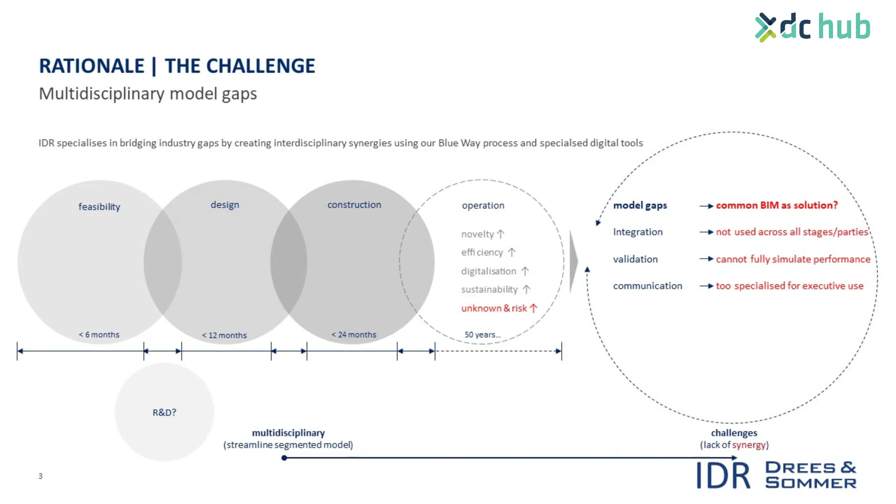To start with, not everybody uses BIM. Certainly not during every stage, and certainly not at every level within any discipline or organization. The second thing is that from a validation standpoint, BIM does not really have the tools to simulate everything. Like, for example, energy performance. Most BIM tools don't do that, or structural calculations, or financial modeling. Most BIM tools do not do that. And I've heard a lot of claims suggesting the opposite.

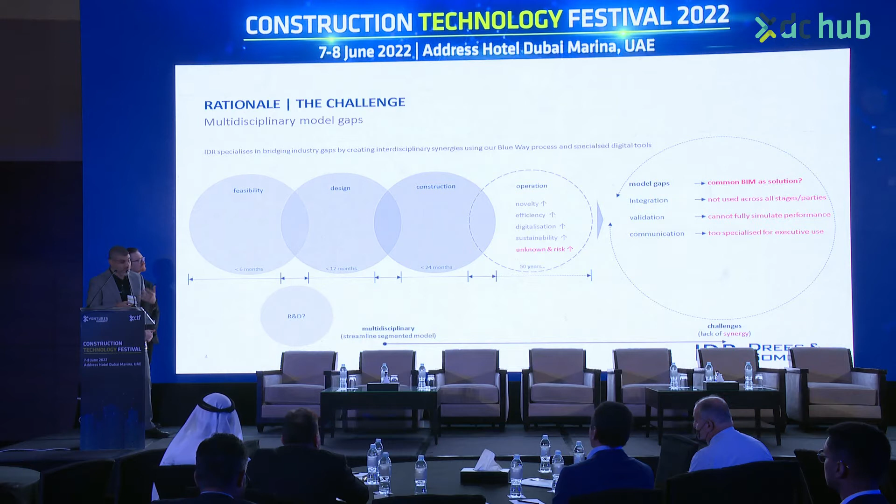From a communication standpoint, because not everybody uses BIM, not everybody is aware of the day-to-day activities and the updates and so on. So there are many challenges and gaps that BIM brings along. So one of the things that we wanted to do from a strategic standpoint is to adapt the multidisciplinary model into something which is more dynamic and interdisciplinary, where we would have a core team that is specialized in whole life cycle design, constructability, operability, and research and development, especially when you have innovative projects.

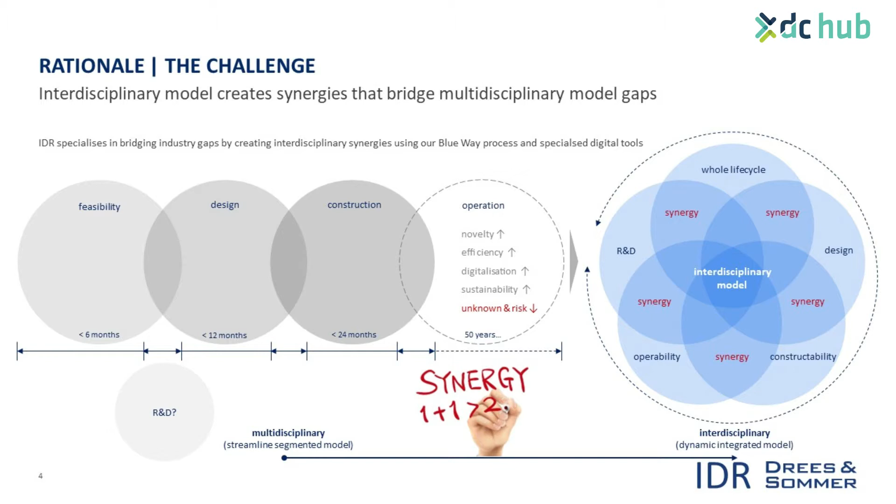When we have innovative projects that require new solutions, new designs, we almost never see a stage called R&D in building construction projects. So if we have this core team that starts with us the feasibility study, and then we maintain that core team throughout design, construction, and operation, at least you know that the criteria is being maintained and things are not lost or miscommunicated.

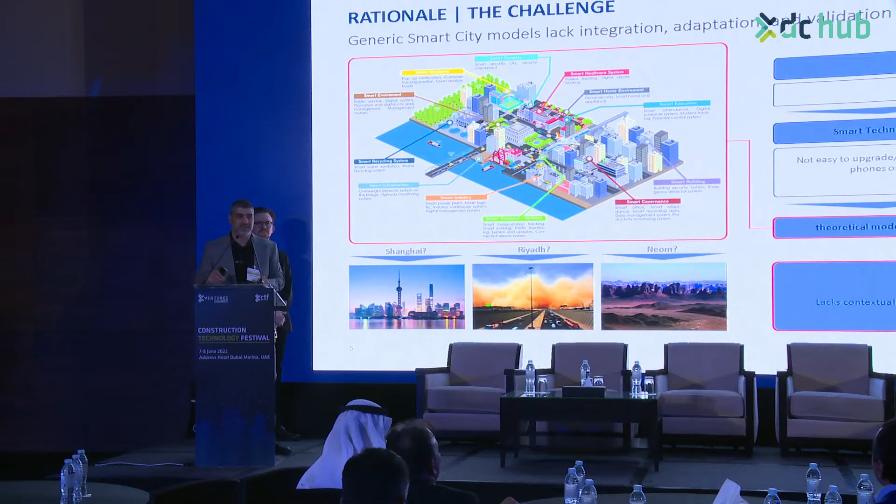Now, we are especially experiencing these problems and challenges when we receive, for example, RFPs to do smart, innovative developments, even more so cities. As you all know, this is still pretty much a theoretical idea. There are a few smart buildings here and there. There are a few small smart developments here and there. But an actual full-fledged smart city is really still theoretical for the most part.

If you go into Google and type smart city, you're going to get a lot of these similar diagrams. They look fantastic from a graphical standpoint. However, when you try to adapt them to actual scenarios, say in Riyadh, how many of these smart city theories have taken into account sandstorms? Or if you want to apply them in a place like Neom, which is very remote and has no infrastructure. So you start seeing a lot of struggles, if not failures, when you try to adapt them, because for the most part we're using new and old assumptions and theories.

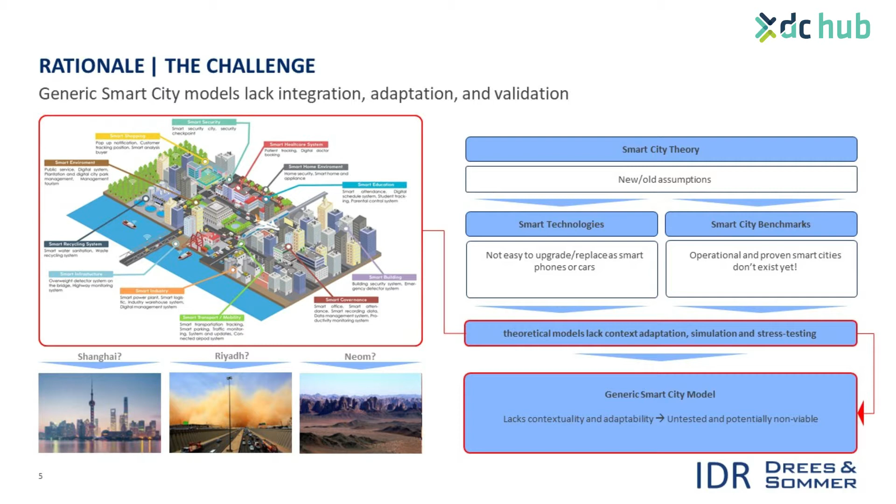Also, many of the technologies are borrowed from other industries, so they were not really made for the building industry per se. And therefore, we create these generic smart city models which lack contextuality and adaptability, and for the most part are untested and potentially non-viable. Another big challenge is that when you bring all of these consultants on board to help you create these models, they speak different languages, they produce their information in different formats, and they use different logics.

So to have a party, be it a person or a group, being able to read all of this information and create the bigger picture in their mind, we call it creating the mental model, right? It's a very, very difficult task indeed.

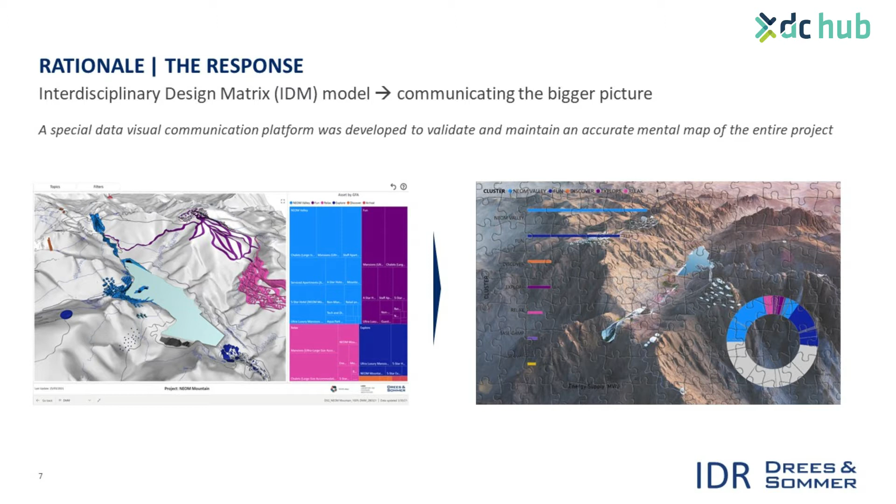So one of the things that we thought we could do is maybe create a tool that can help us, at least from a high-level executive standpoint, to capture the essence of what all disciplines are producing, right? And integrate them together so that we can get a clearer picture. As I said, this is especially targeted for executives because people who are involved on a day-to-day basis have a better understanding of the project.

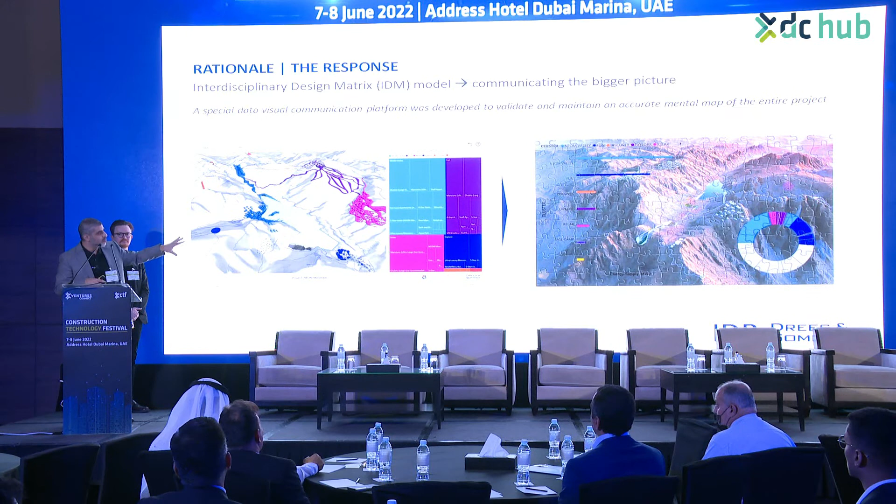Executives, however, need an executive summary, right, which you cannot provide in BIM, you cannot provide in digital twins, and so on. This is basically what we're aiming for. And my colleague here, Dr. Greig Paterson, is going to present a case study to demonstrate how we tried to do that.

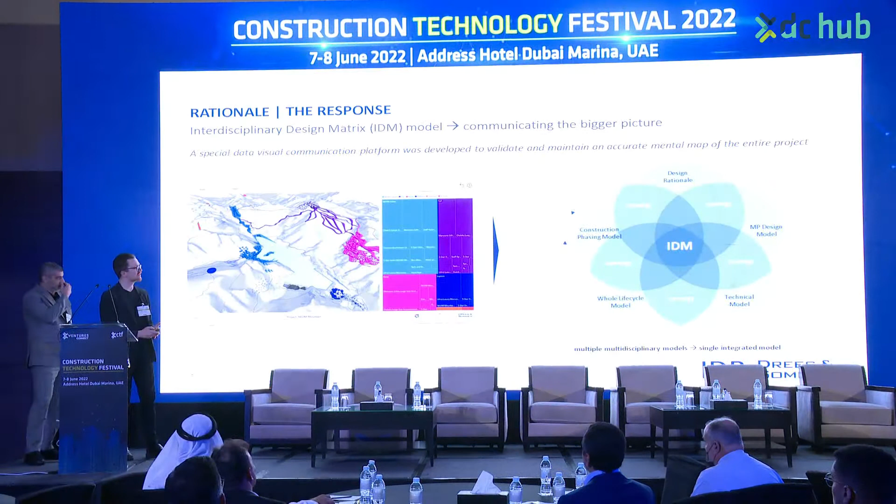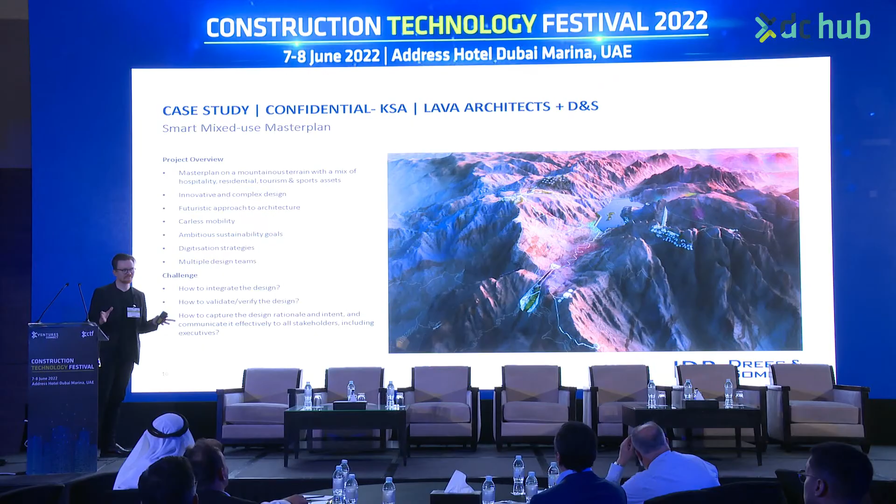Yeah, so as Majid mentioned, the best way to demonstrate this is just to walk you through a very quick case study. So this project is somewhat confidential. I'm sure many people in the room recognize it. It's in Saudi Arabia. It's in a very challenging mountainous region.

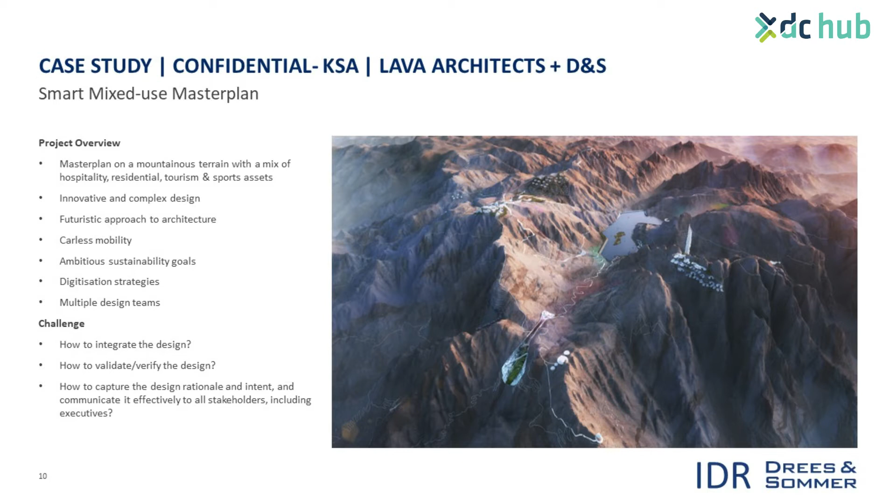The strategies within the project are also very ambitious: very futuristic architecture, carless mobility, digitization strategies, very stringent sustainability goals, and all of this mixed with a very large design team working on different parts of the design. So our challenge was, A, how do we integrate all of this together, and then B, how do we communicate this to key stakeholders, particularly at the board level, who are not necessarily engineers and designers.

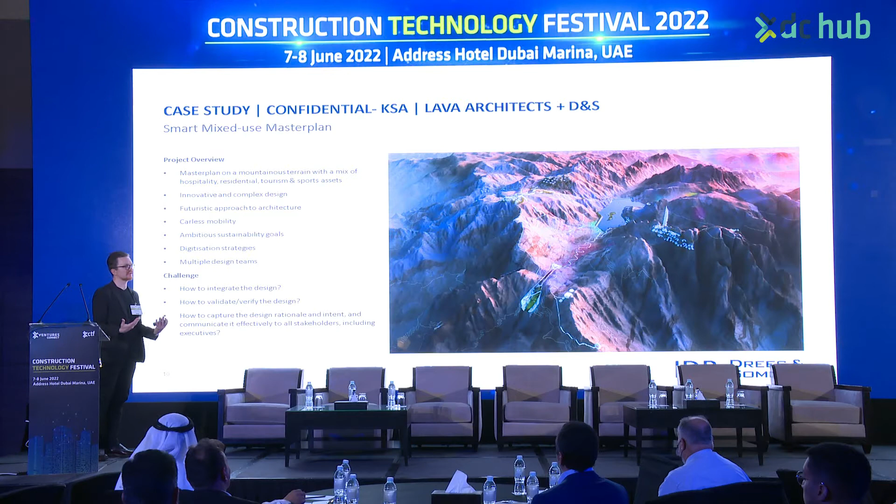So the process to create the tool that we described earlier was first to constantly collect data from the design team. So this is 3D models, engineering Excel sheets, reports. We then go through a process of categorizing all of that data, lining it up depending on if it's text or if it's visual, enabling it to be fully connected and interactive.

We then begin to create the model in a bespoke way for each project, creating the interface and setting up the networking, and then finally it ultimately will be used for data visualization in a very user-friendly way at the board level. I think it's best to jump straight into a video demonstration.

The Interdisciplinary Design Matrix, or IDM, is a high-level executive summary digital interface. It assists users in visualizing key project information for innovative, smart, sustainable projects. The assets and infrastructure within the IDM are fully interactive.

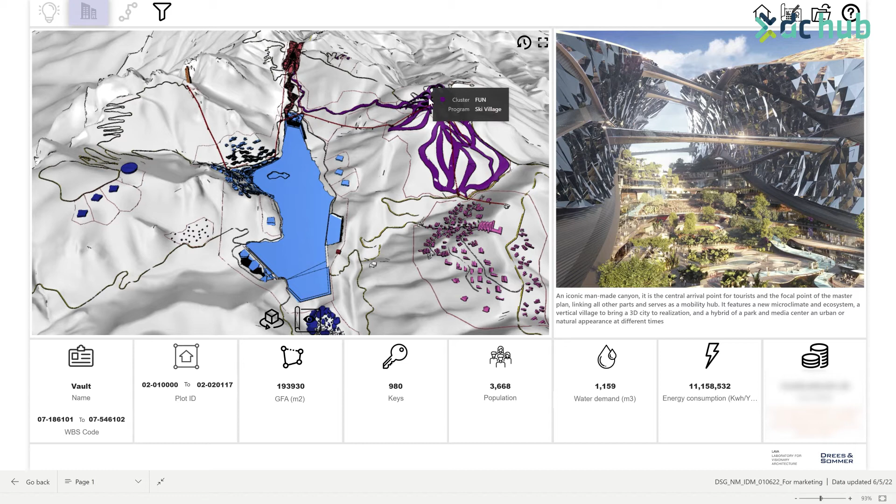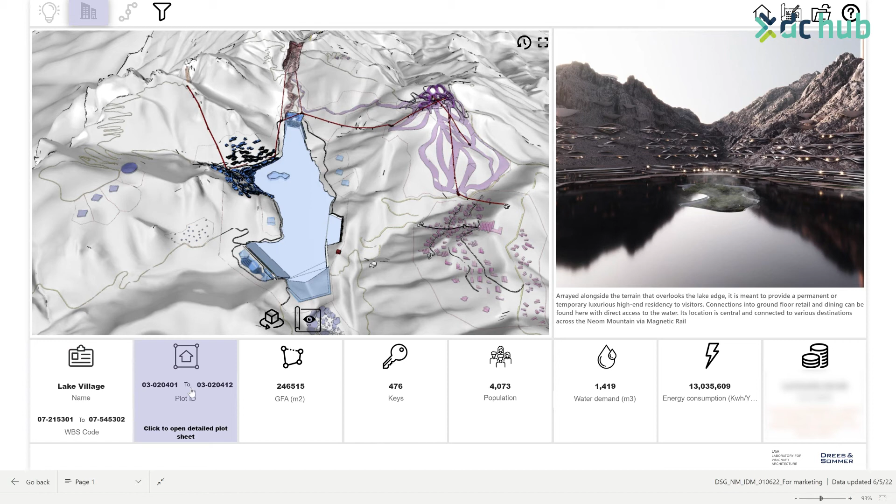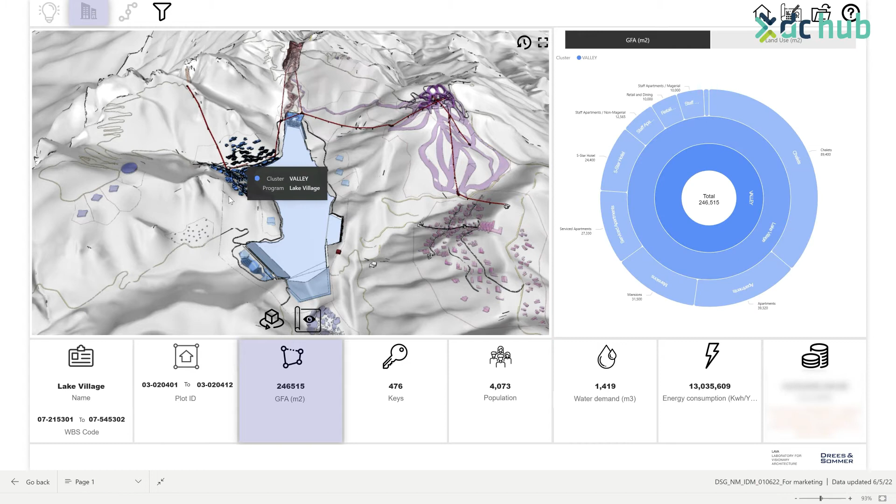For asset data, the IDM has a large 3D interface and data visualization panel on the right-hand side. The interactive data menu contains information on each asset, including name, areas, water demand, and cost. For GFA, data can be visualized for individual assets as well as for the complete master plan. This information can be filtered to show, for example, a particular cluster. Data can also be easily shown for land use area and population.

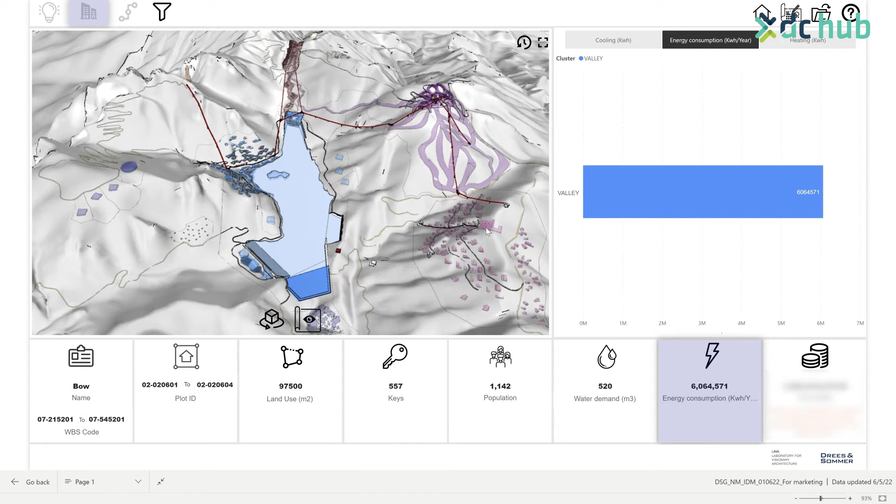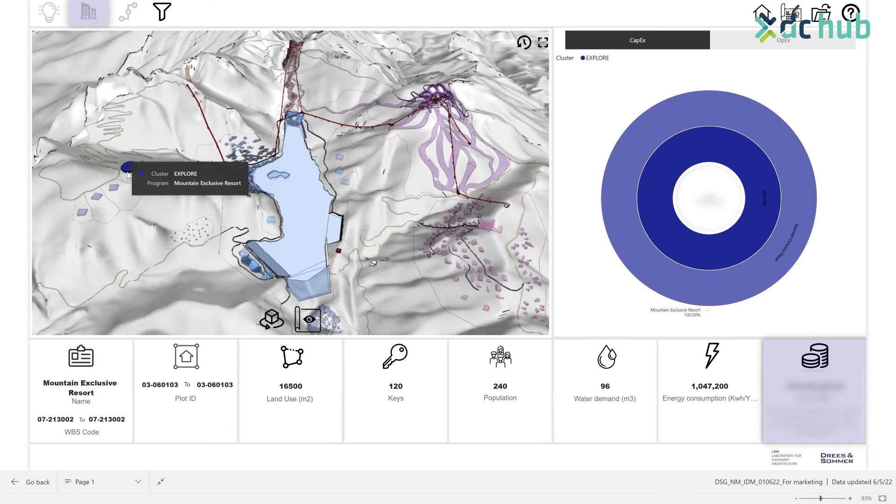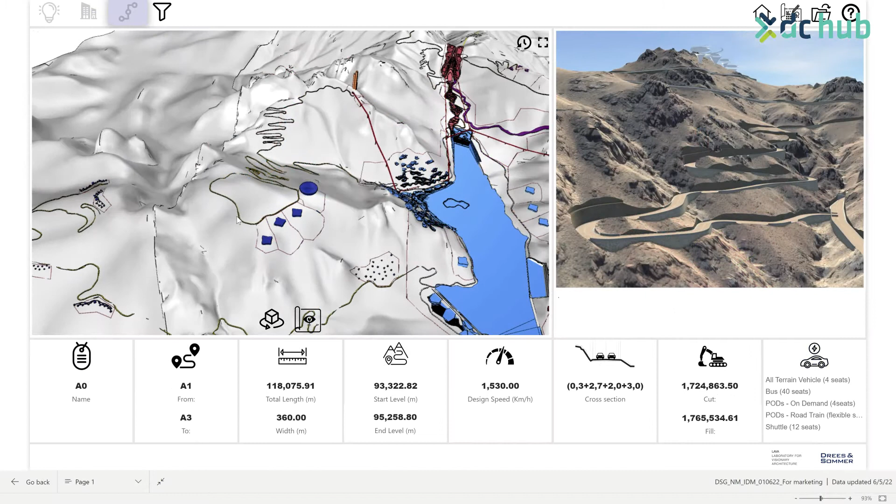Technical performance, including energy consumption, can be explored at different scales. The capital cost breakdown for the entire master plan can be shown and visualized for individual assets and infrastructure items. Operational costs are also available. In the infrastructure section, key information on access routes is shown, including typical cross-sections and vehicle types for each selected route.

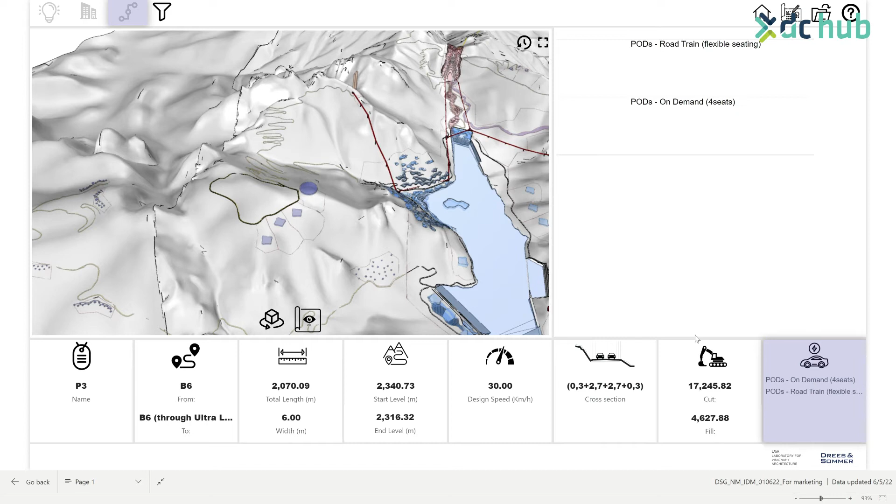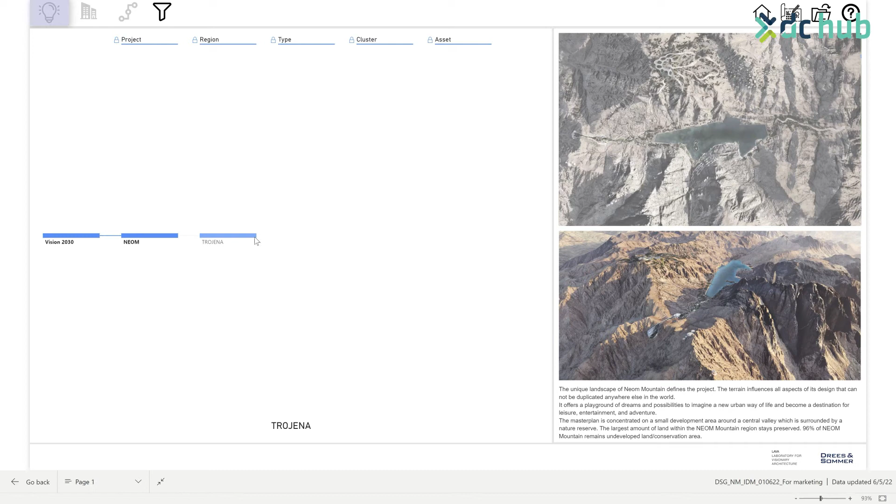The final main section shows the design rationale. The design rationale offers an overview of the project by providing a summary of the master plan at different scales. The method gives a high-level understanding of what each major component of the master plan is, and importantly, why each component is planned the way it is, starting from the country and master plan levels, moving to the infrastructure, asset, and landscaping levels, and finally to the cluster and asset levels.

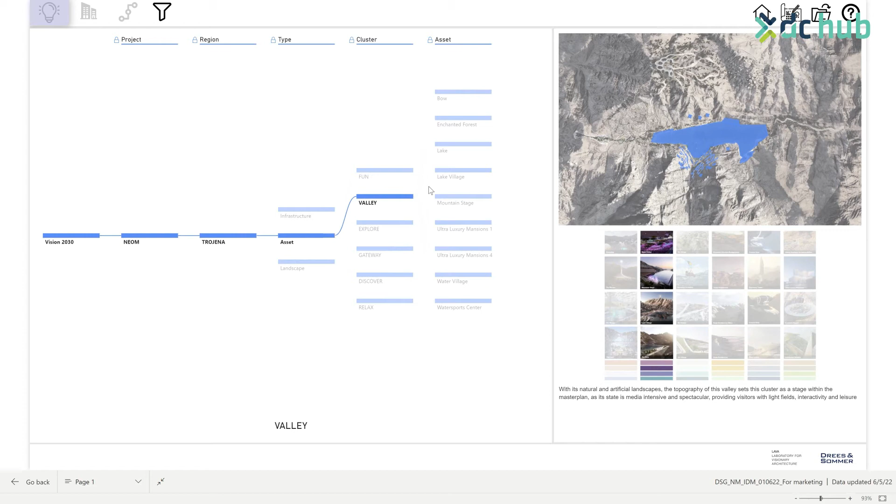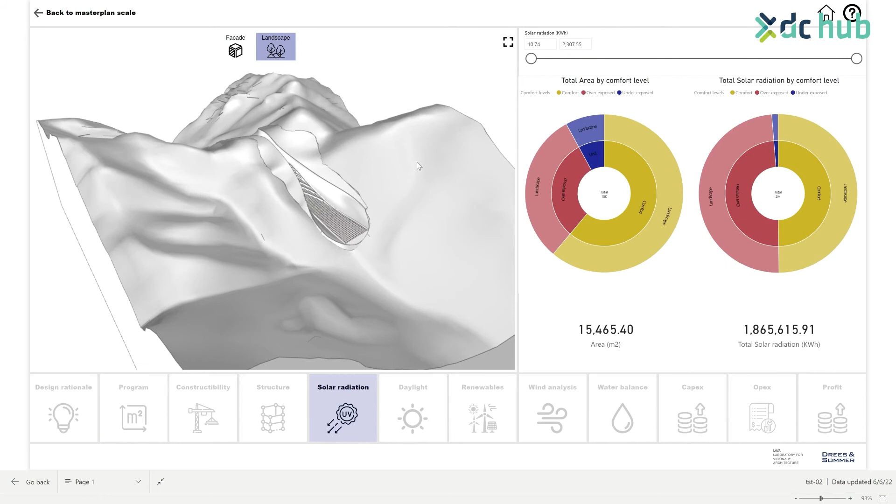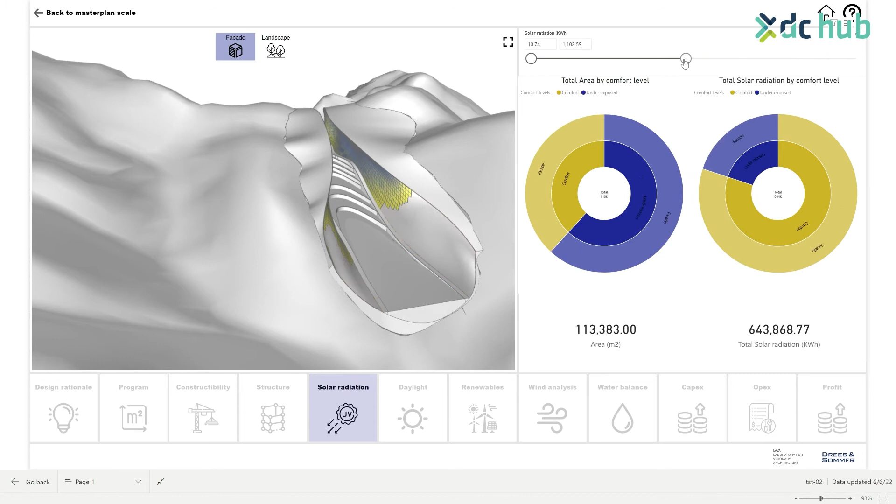For selected assets, a range of analysis can be explored. For example, for the vault, annual solar radiation can be visualized, for the landscape, and facade. Wind flow can also be explored from different angles. In conclusion, this platform helps users formulate a high-level, full-picture understanding of innovative, smart, sustainable projects in a user-friendly and interactive visual fashion.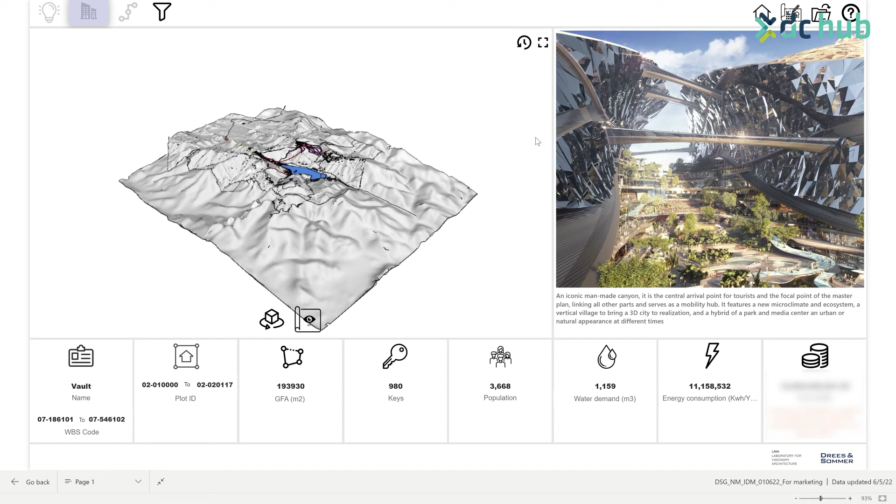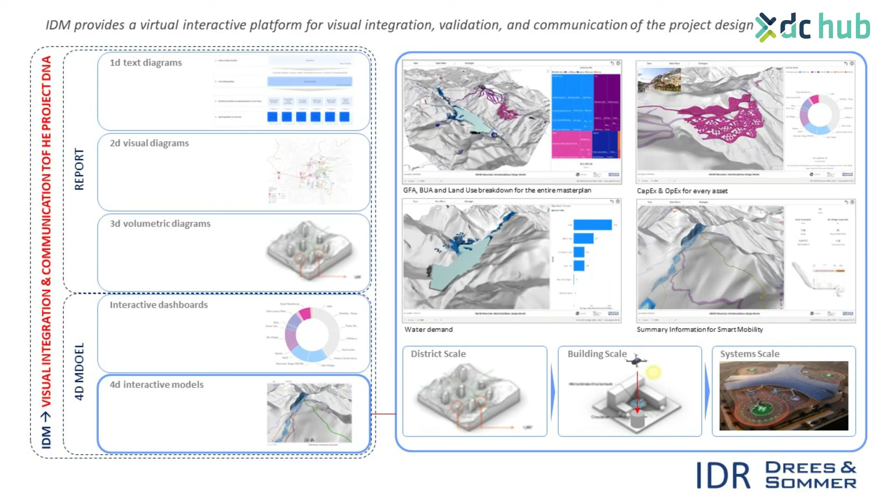Just important to note that depending on the complexity of the project, a different type of model would be fitting for it. So we start off with text and simple 2D diagrams, before moving all the way into 3D and 4D interactive models. But the key for all of them is to be very simple, lightweight, agile, and user-friendly.

Thank you, Greig. So yeah, effectively, what you've seen is not an attempt to replace BIM or digital twins or to replace 2D drawings or reports or the usual things that we normally produce. This is, however, an attempt to try to bring them all together in one environment in a high-level executive manner, so that people who don't have the time or don't have the skills to browse the other information are able to do so and still understand what the project is about.

With that being said, and as Mr. Haroon demonstrated nicely just a second ago, if we, for example, combine immersive technologies, right, along with this IDM, then people will be able to experience things in a more interactive way as well.